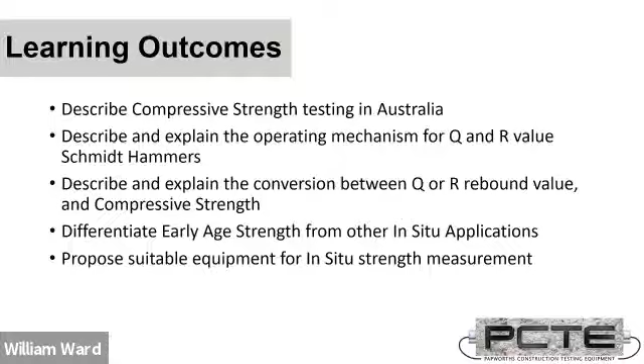I'm also hoping you'll be able to make an intelligent choice of equipment for in situ strength, and know when non-destructive methods are appropriate and when it may be more appropriate to use destructive methods.

Schmidt Hammers themselves are one of the oldest forms of concrete non-destructive testing. Excuse me a second, I'm just going to mute there.

They were invented by Ernst Schmidt in 1950, and have been manufactured by Proceq since then. They're a non-destructive measurement of concrete strength, particularly related to surface hardness, and they're mechanical.

One thing to keep in mind is there's a good case to maintain the calibration and support of your Schmidt Hammers, and also to think about how long they have been in service.

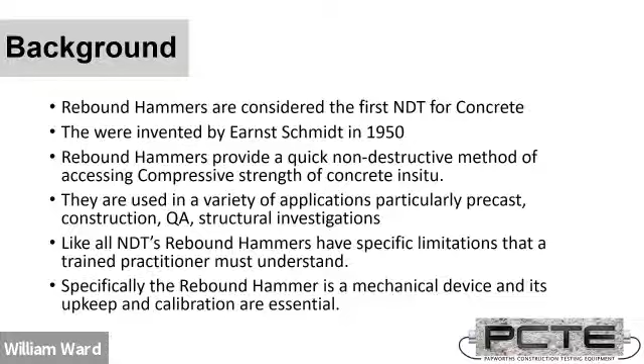As a general guideline for calibration of the different types we supply, the original Schmidt design is typically calibrated once a year or every 1,000 impacts, and the SilverSchmidt design, with its better sealing and slightly different measurement mechanism, is able to be maintained without calibration for 5,000 impacts, or again, we'd like to do that yearly anyway.

So let's just quickly explain what a Schmidt hammer is. It's a rebound hammer, and we correlate a rebound of a standard force on the concrete surface to a converted compressive strength. So a Schmidt hammer is not a small compression testing machine.

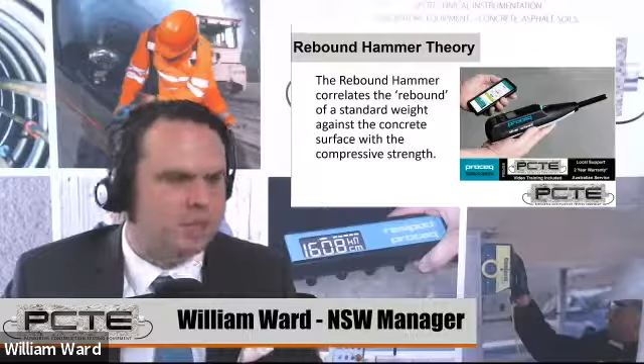It's not taking the same measurement as when we break a cylinder. Instead, we are using information from broken cylinders to create a relationship to Schmidt hammer tests that were conducted on the same cylinders, and that's where the MPa values come from.

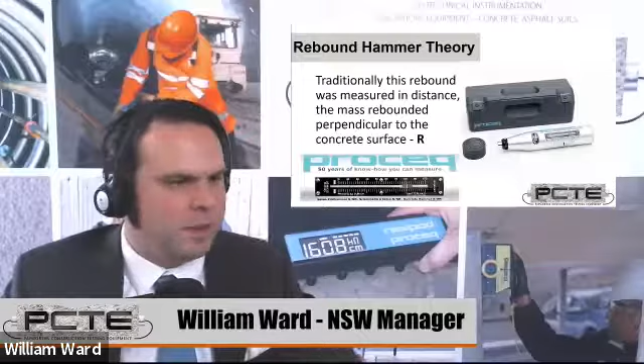The traditional rebound hammer, the original Schmidt, which I've got a picture of here, measures the distance of rebound height. So if you look at the chart, we can see that would be a reading of 82R off that scale, recorded by how far the weight inside the hammer rebounds.

I'll actually show you a quick diagram of the internal workings of these hammers in a second, so you'll be able to see what I mean in more detail. But the original Schmidt's design does use a height of rebound as its measurement.

It's converted to compressive strength using a calibration curve. These are either supplied with the hammer by the manufacturer, so if there's a curve printed on the side of the hammer, or if you're using an internal conversion from units of R or Q, the rebound values, across to compressive strength, you're using a manufacturer curve.

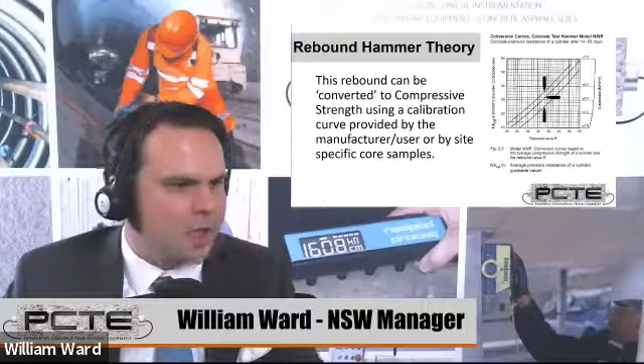Whereas if you've worked with a laboratory to crush samples and build your own relationship, you've made a user or custom curve, and that is the preferred method. It's always best to have curves made for your particular materials, and to understand where the manufacturer's curves come from if you are using them.

Just the first bit of background I want to cover quickly is to go through Australian Standard 1012.8 and 1012.9. Between the two of these, they cover the casting of standard cylinder samples, their curing, their preparation before testing, and the crush testing to break them. That defines what we mean when we say compressive strength of concrete.

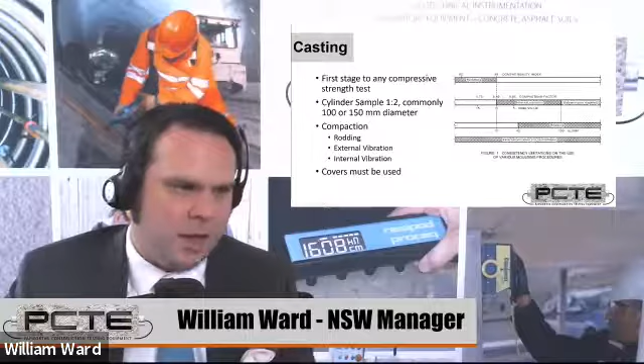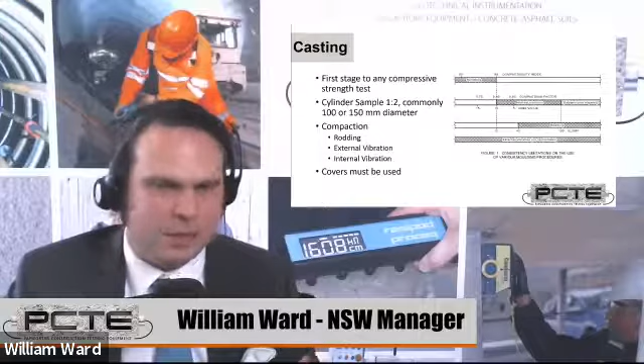The samples are taken from the concrete used on site, or prepared as part of a test batch, and placed into a 2-to-1 cylinder with a cover and appropriately compacted. The standard defines dimensions and compaction procedures to correctly cast that cylinder, cured initially in the mold between 18 and 36 hours, at which point it must be taken out and placed into a standard curing environment, either a water bath or a fog room.

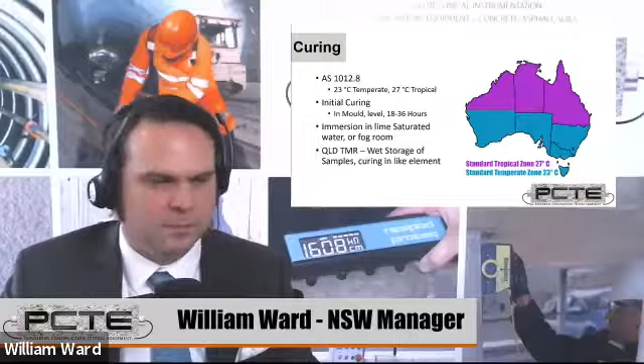There are also sometimes specific requirements beyond the Australian standards depending upon the client you're working with. For example, Queensland Main Roads requires wet storage of samples, curing similar to the element. It's also interesting that we have different standard curing temperatures depending on where we are in Australia. If we're in Queensland, we're in a tropical zone; if we're in New South Wales, we're in a standard zone.

The samples are then inspected. Because one surface in a cylinder mold, which is to be compressed against the platens of the compression machine, is not smooth off the mold, it's either ground plane with a cylinder grinding machine, or has a sulfur cement cap applied, or a rubber cap placed on top to ensure smooth contact, and then it's broken at a rate of 29 MPa per minute.

The standard also defines how that information will be recorded. One important thing is typically these tests are done at 28 days, which means if we want to compare compressive strength values between two different batches, the tests need to be prepared the same way and broken at the same time. That's the whole purpose of having the standards, to ensure that because we're not directly measuring a material property—there's no absolute compressive strength value that concrete inherently has.

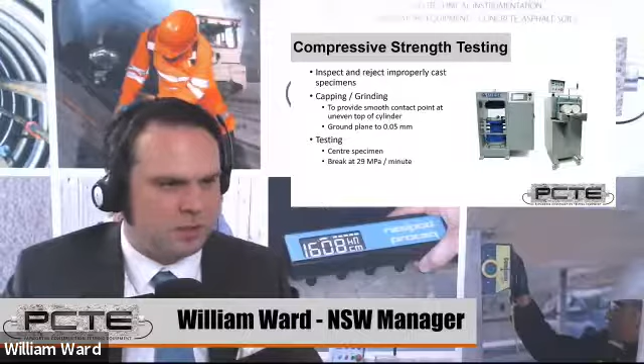It's an agreed upon test method where a certain amount of pressure breaks a sample at a certain time when it's been prepared in a certain way. This is why it's very important, when comparing strength results between two projects, to understand that the tests are done the same way. If you look at overseas research, or in particular things like Schmidt Hammer conversion curves, sometimes those tests are not done the same way overseas. We'll address that a little as we go, but I wanted to talk briefly about how a compressive strength test is conducted.

Moving to the Schmidt Hammer itself, it's at its essence a test of surface strength or hardness, and it's correlated out to strength. The original Schmidt curves will actually have a directionality to them too—vertical or horizontal testing, up or down—and it's establishing what's happening at the surface of that material, so it doesn't take into account the heart of your concrete.

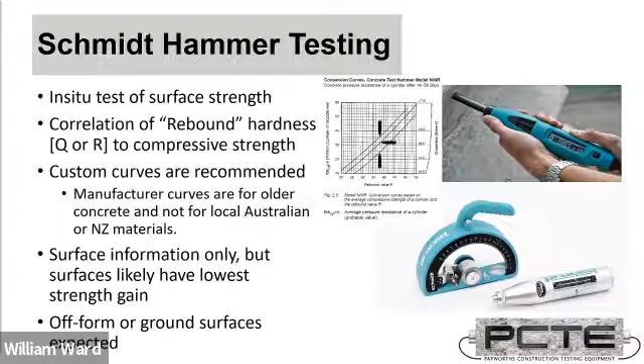This is sometimes not an issue if you're looking to see strength gain—it may be lower on the outside compared to the inside. It is also typically correct to test only on off-form surfaces or surfaces that have been ground back. A work surface at the top of an exposed slab is going to have a different rebound value to the off-form sections of the same material, so that can be a bit of a catch when you're trying to be very precise with Schmidt Hammer measurements.

In standards internationally, and as manufacturers build them, there are two rebound energies used: a type N and a type L. Type N is a stronger impact than type L. Type N is generally used for normal testing, and type L for thin concretes or very weak concretes. Also, an important nuance is that when you go from concrete testing to something like rock testing, it's common to use type L, because the most commonly used standard there, the ASTM standard, actually expects a type L and doesn't mention type N.

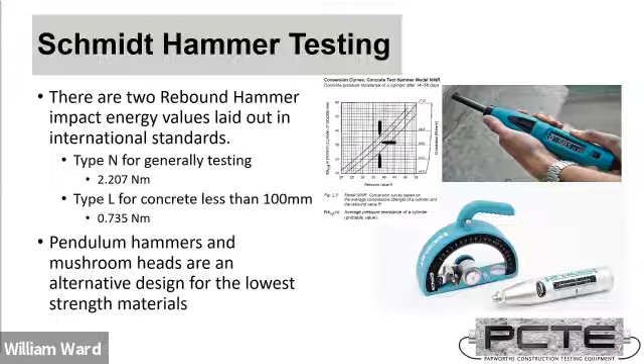So that's something to consider—is there a reason to go with a default impact energy, or do you need a specific one? There are also more specifically designed hammers for very low strength. There's a pendulum hammer, shown on the right, which strikes with a lower impact energy and a broader impact face. Similarly, it's possible to modify a type L Schmidt hammer with what's called a mushroom head, which again has a broader impact face to lower the overall force of that impact. Based upon that, you can determine which particular Schmidt hammer range you'd like to work with.

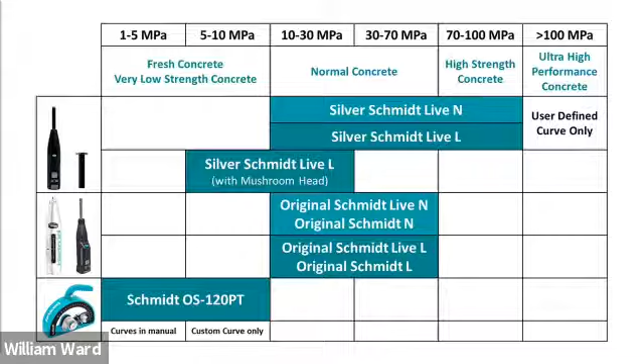Of particular note is that the original Schmidt, in addition to being a little bit more scattered in its results, has a smaller measurement range over which it would typically be used. The SilverSchmidt is larger, and the pendulum hammer, listed here as the OS 120, is most commonly used only for very low strength concrete or initial curing applications.

Let me begin in terms of mechanism. We'll start with the original Schmidt device. The original Schmidt hammer measures rebound height, so we have to apply the type N force. To do that, we have a spring which is tensioned, and a weight. So we know the spring, we know the force. The spring will pull the weight down, which will rebound with a certain amount of force, and that rebound height is recorded.

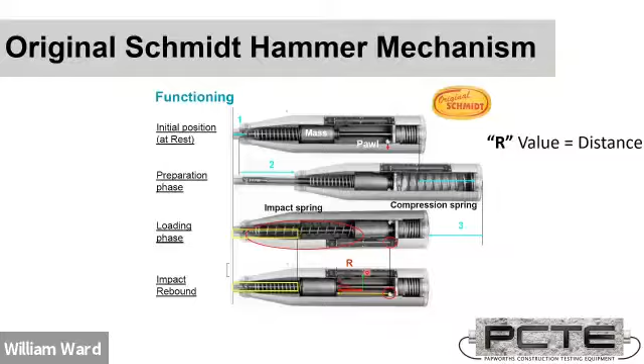So we can see here that we actually measure out the distance that that rebound has occurred, and we're going to convert that.

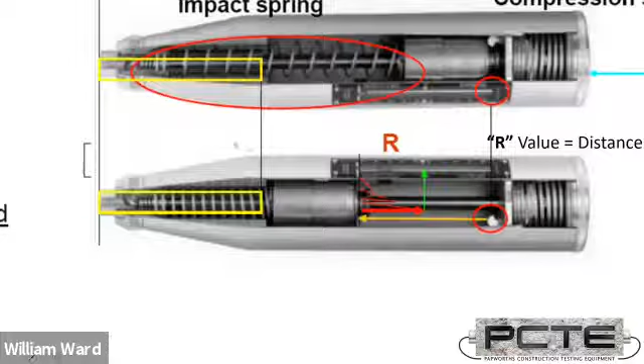And you see then, again, as I showed at the start, we have the height of the cursor. Now we've taken an impact, we've got a value of rebound, but we don't yet have anything that talks about strength. If we want to talk in units of MPa or PSI or some other measurement of pressure, we need a conversion curve. And it's important to understand not only what the conversion curves do, but also how they're created.

You need, if you want to use a curve created using cube samples, to correct back to a cylinder sample curve. If you're using a digital hammer, the original Schmidt Live or the SilverSchmidt Live, you can tell it what your local sample type is and it will correct automatically. But it's very important to be mindful, if you're using a manufacturer curve or a curve from literature, what kind of samples it was created with.

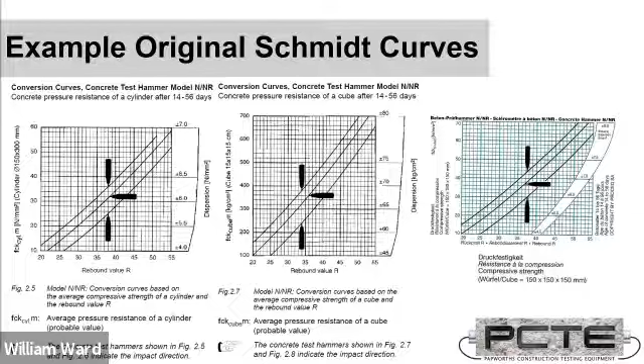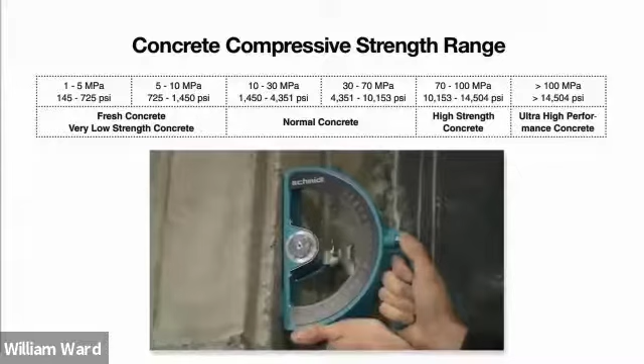So I'll move on to a few more mechanisms now. Let's start by looking at the pendulum hammer mechanism. This is a really clear example of a rebound height measurement. You'll see the pendulum swing and you'll see it rebound to a certain position here, and how that would be read off - so that would be a rebound of 130. And again, this would have a different conversion curve to the SilverSchmidt.

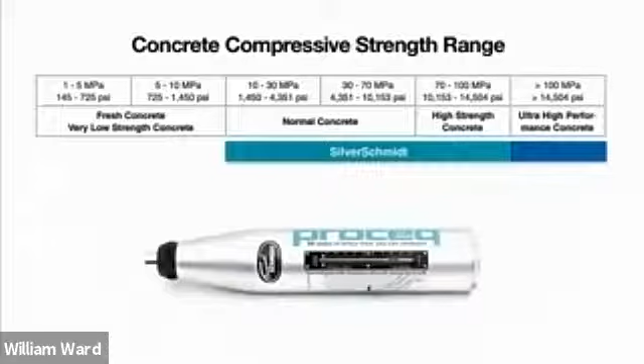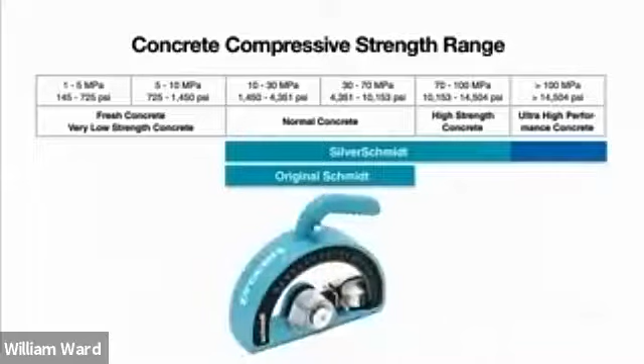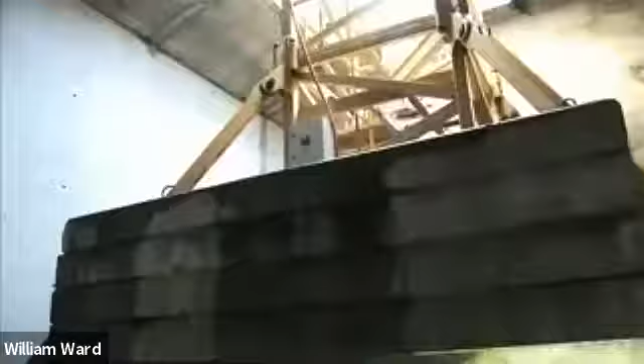Now the SilverSchmidt - this is an optical measurement tool, and we'll see that in a second, but again we're just going through the different mechanisms. The blue SilverSchmidt is a previous model. If you have a SilverSchmidt Live, it is exactly the same internally on the mechanism as a SilverSchmidt PC or ST model - it's been mated with new data logging functionality that now goes to a phone or tablet. I'll show you the data logging when we finish going through our theory this afternoon. But so we'll look at a SilverSchmidt test now. It's used the same way as the original Schmidt.

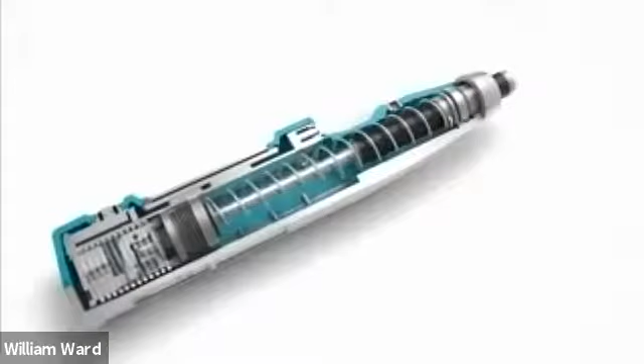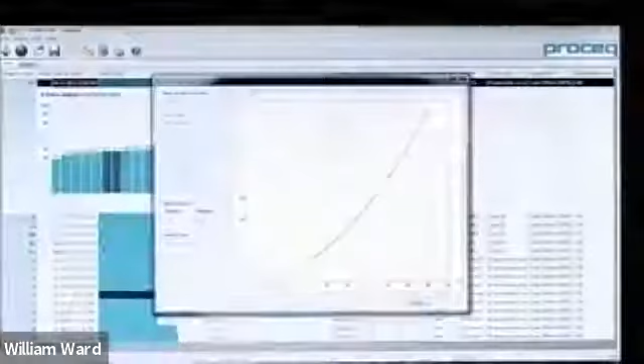So with the SilverSchmidt mechanism, the hammer moves and rebounds off the mass, and we measure the speed of that. To test one area, you take several impacts, usually at least 10, separated by a couple of centimeters. Those are averaged and converted to MPa using a conversion curve. I'll cover how that's done with the SilverSchmidt Live in a moment, but this is the same kind of conversion.

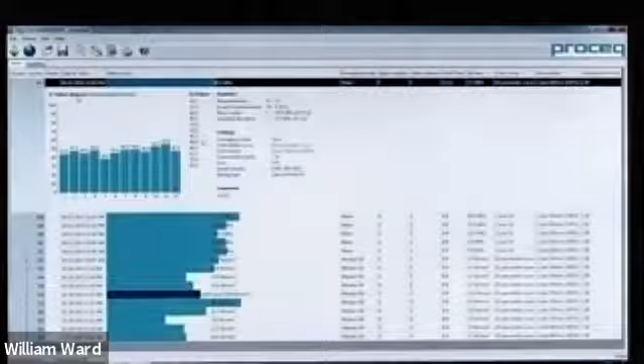So why have we changed from an original Schmidt mechanism to a SilverSchmidt mechanism, from mechanical to optical measurement of rebound force? The difference is primarily one of precision and range. It's not more accurate - a SilverSchmidt test is not necessarily a more accurate measurement of strength, but the results have less scatter to them, and it certainly is more appropriate to use a SilverSchmidt on higher strength materials.

So the first big advantage is the speed measurement, and the hammers themselves remove the influence of gravity. We no longer need to create 3 conversion curves to know if we're facing at an angle, up, down, or sideways. We can test at any angle - gravity is no longer a concern.

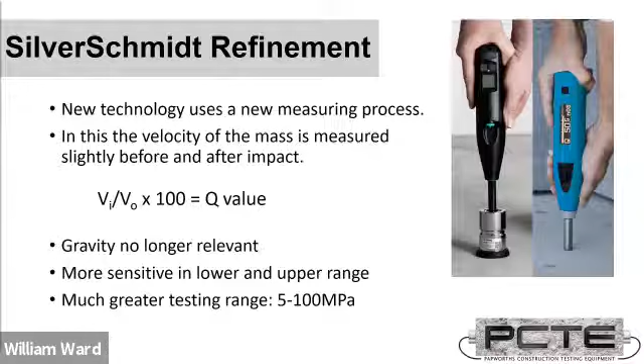It's also got a larger testing range, as we saw in the comparison. The standard curves go up to 70 MPa, and it's possible, where appropriate, to build your custom curves to a higher value than that.

The reason that works is there's 2 effects. One is the curves have a more shallow change between rebound value, so raw units of Q, and strength, so it's a little bit more precise inherently.

The other part is, particularly when you're measuring, is that you're no longer measuring by eye. If you have a rebound hammer, which may be measured to 0.5 of an R value, an original Schmidt measurement, and you try and go from 70 to 75 MPa, your R value may go from 55 to 55.5. That's a very small change, and it's very hard to see on the side scale of the hammer. With a digital measurement, we can pick up that change more precisely, and with the inherent more shallow conversion curve, it's also more appropriate for greater strengths.

So we have a question from Jimmy: does the result get affected by amount of reinforcement, i.e. a heavily reinforced concrete or composite beam? That's a good question, it's a reasonable question. Typically, Schmidt hammer results should not be affected by the steel because it's a surface test. If you had steel with incredibly low cover right under the place of impact, that might have an effect. But because steel should be with 40, 50 mils or more cover, and we're impacting off the surface, that's not going to affect the measurement.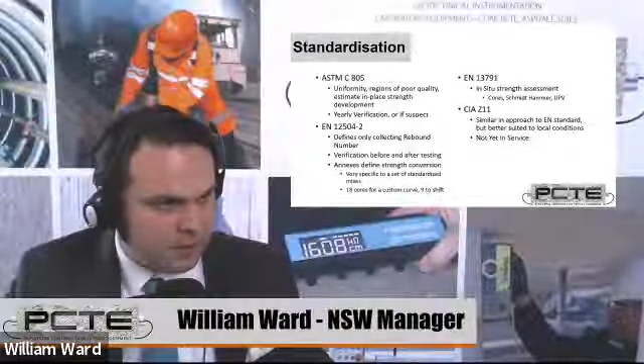The ASTM standard is an American standard. It defines primarily that Schmidt Hammers may be used for uniformity, to find regions of poor quality concrete, and to estimate in-place cured strength. It recommends a yearly verification, similar to our yearly calibration. The American standard is interesting, they're very good at defining what the test is, what the hardware is, and a little about documenting it, but less about how to use and interpret the results.

Now, there's a couple of European standards that do relate: EN 12504-2 and 13791. 12504 defines the collection of the rebound values, the R value or Q value, and it also has a more stringent verification requirement. They want the hammer to be tested versus a reference before and after the test procedure, to ensure it's within calibration before the test occurs and remains in calibration after testing at that site. That would normally be done with a calibration anvil.

There's also a more compact verification anvil available with the original Schmidt Live and SilverSchmidt Live. This is a question that does sometimes come up on the SilverSchmidt Live or original Schmidt Live application, when it mentions verification, that's what they're referring to. Your calibration certificate is more a reference of whether the hammer was supplied reading correctly when supplied and when tested.

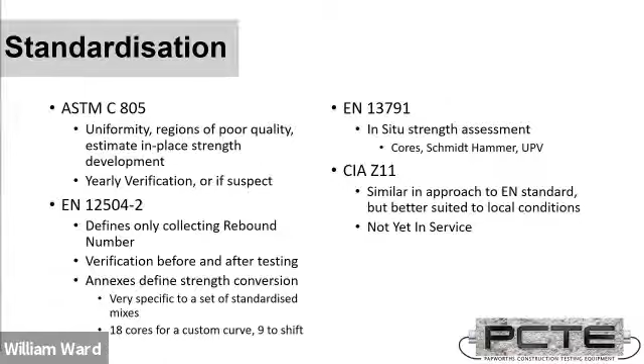Now, as Marek mentioned, carbonation is one other source of interference. Carbonation refers to the effect where carbon dioxide is absorbed into the concrete, forming calcium carbonate and water. This is of concern normally because the carbonic acid that forms is actually a risk of corrosion of the reinforcing steel, as it reduces the pH of the concrete.

But in the particular case of Schmidt hammers, it has an effect where, while the compressive strength, the strength required to break that concrete, does not change, the surface hardness does. Schmidt hammers assess surface hardness, so there will be a higher rebound value where you have carbonated concrete. So older structures, this is of concern, or structures with particular exposure to carbon dioxide, like road tunnels.

If you would like to correct for carbonation, the manufacturer's recommendation is to test the carbonated region, grind back below the depth of carbonation found with phenolphthalein pH indicator, keep it smooth, and then get the conversion ratio between rebound values on carbonated concrete and internal uncarbonated material from the same area.

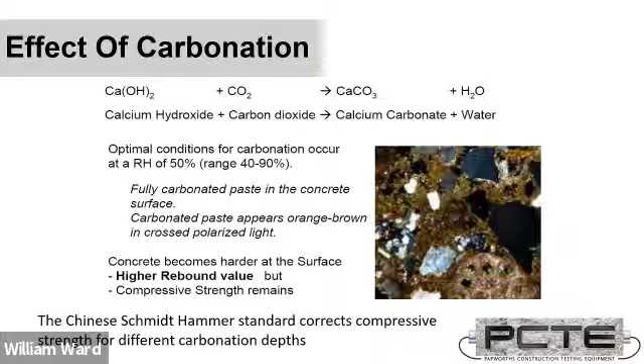Sometimes that won't be good enough, sometimes that uncertainty isn't appropriate, so there are other approaches you can take. You can consider looking at relative strength rather than an actual MPa strength.

Because Schmidt hammers, the conversions are only so good. But one thing a Schmidt hammer is very good at is determining the difference between the same material in different places.

The example I always like to talk about is if you finish one pour with a concrete mix and you've got all your compressive test records and they're correct, and you then have a second pour and for some reason the samples are lost or incorrectly cast, so you don't have compressive strength records for the second pour of the same material, it can be very appropriate to gather raw Q or R values on the known good section and then determine if the second pour, where the results were lost, has similar values, comparing relative strength.

And if there's a difference there, then maybe it needs further assessment. You can also use this where, for example, you are taking some percentage of core samples, collecting and breaking cores in regions where Schmidt hammer tests have been done, and then testing that same mix away from that core area. It extends the validity of those cores, because one of the big issues with a core sample is it's a single point in space. You know that material's right or wrong, but you don't know if an area a meter away is right or wrong. A Schmidt hammer can give you that, and is very good at giving you that.

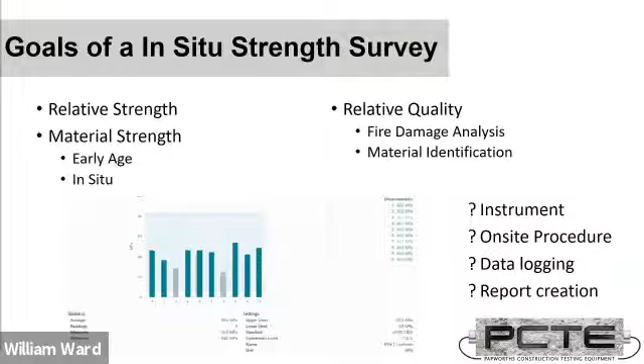So if we are working with the manufacturer's curves only, and it is already a reasonable match to the material on site, your accuracy will still be 20 to 25% uncertainty. We don't know exactly how that matches up, even if it was a reasonable material to use a manufacturer curve for. Manufacturers and standards absolutely encourage users to produce their own curve, as I'm doing today.

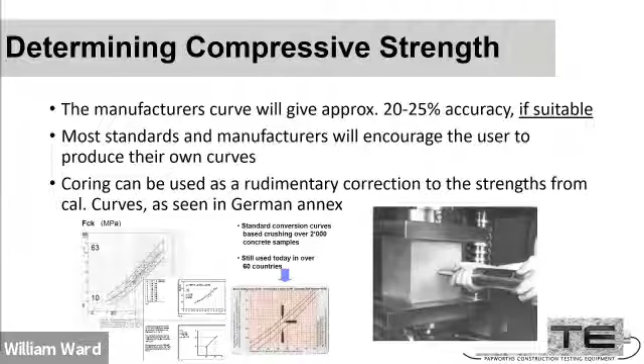You can do rudimentary corrections to strength by shifting existing curves. So if you have a rebound value and a crush sample, you can reduce or raise the entire curve relatively, which is not ideal, but is one way to do a correction.

Now, just to go with manufacturer curves and what the default ones may be, this is for a SilverSchmidt Live in Australia. The key thing is you need to use a 2-to-1 cylinder factor on your scale, because that takes into account that we crush cylinders locally. Units of MPa, that's just appropriate units. It's also entirely appropriate to work without conversion, in raw units of Q value.

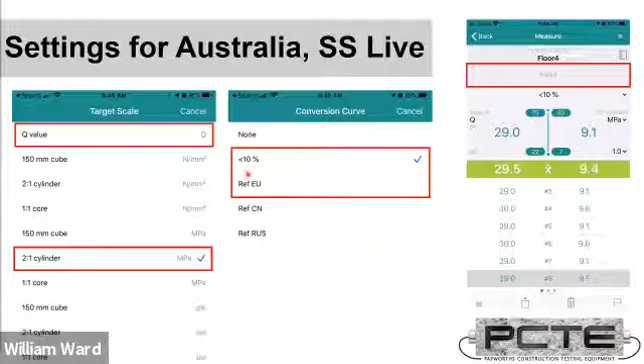Now, the manufacturer supplies us with a number of curves. The two most commonly used are the lowest 10th percentile curve, less than 10% on the chart here, useful for in-place concrete, existing structures where the concrete is cured and has been in use for some time. The European reference curve listed here is reference EU. This used to be called the traditional N curve on the SilverSchmidt PC models, and is more commonly used for freshly cast concrete, so early age strength applications - it can be used as a rough guidance there. Because we're not testing to any international standard, we most often use mean as the setting for standard.

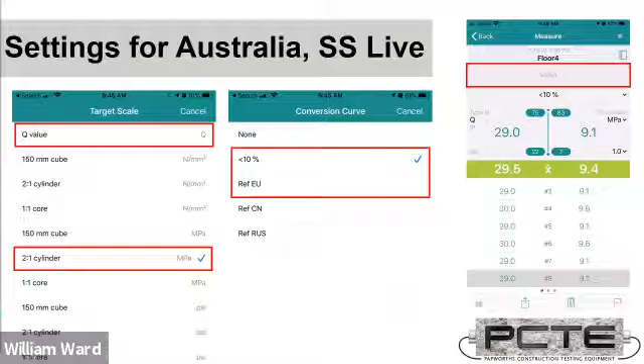Now, the conversion curve and the target scale for the SilverSchmidt Live or the original Schmidt Live are set on the application. I'll show you that when I open the application up shortly. But the standard is physically set on the device, so it's going to be a little bit harder for me to show you that - it's a setting we change on the hammer, it's the standard. The other two are changed on the application and can actually be changed after the test. So if you've put the incorrect values in, you can correct the mistake afterwards because it's non-destructive.

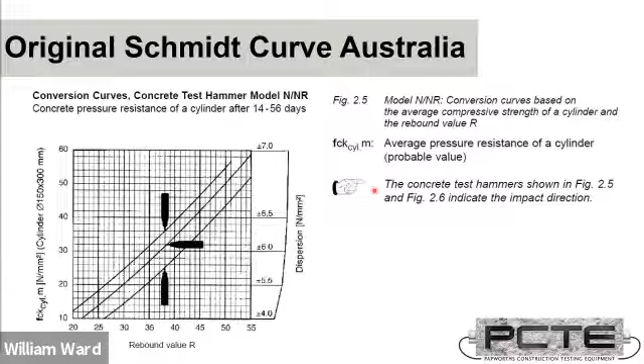Again, most commonly, an original Schmidt curve used in Australia is a cylinder curve, so please be aware of that. And again, you would pick that in the original Schmidt Live application.

So let's just talk quickly about how you make your own conversion curve. You need a series of sample tests before you can build a conversion curve. Typically, if you're taking cores, you would conduct Schmidt Hammer tests in the region of the core, then secure and break the core. If it's cylinder samples, the cylinders need to be properly supported to resist the energy of that Schmidt Hammer - in a cradle of some sort, clamped into a machine, held firmly, so all of the rebound energy is returned by the core. It's not free to move under the impact.

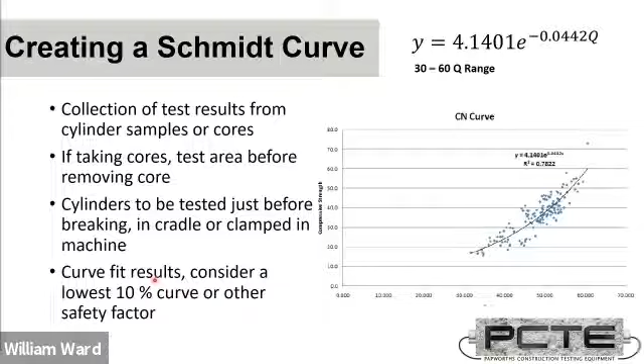And again, once the data is collected, a curve fit is established, and the formula shown here, which matches that relationship, is recorded. This can then be input into the Schmidt Hammer application. In this case, we've put the same information in - it's got a 30 to 60 Q range. So we actually tell the device that we only want the machine to return values of MPa if Q is above 29, below 60. It gives that relationship a value of between 15 MPa to 59 MPa that it can evaluate.

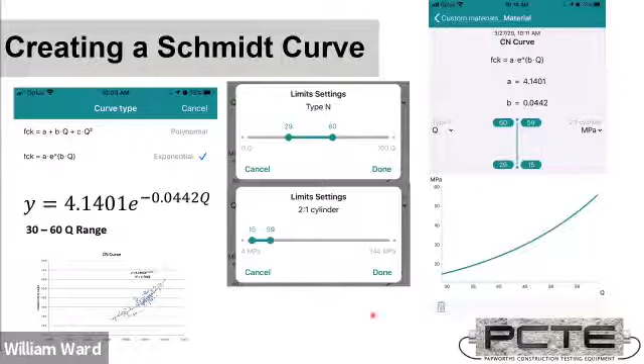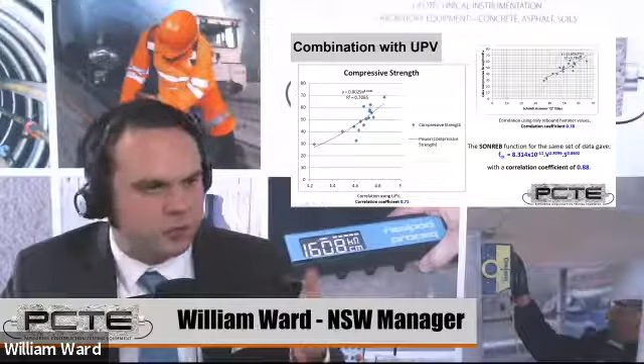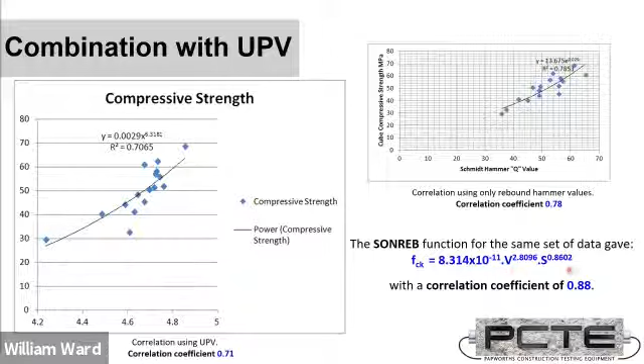So going from there, it is possible to use the same kind of correlation with other non-destructive tests. Quite a common one is to use ultrasonic pulse velocity - that is the transmission time of sound waves through the concrete from one side to the other. We measure from one side to the other, determine the speed of transmission, so that's velocity. In the calculation, we typically measure the distance the sound has to travel and calculate velocity based upon that. Once we've done so, we can also take Schmidt Hammer results and use a correlation curve that, rather than being built with only rebound value or pulse velocity value, is built with both - so it has an input of velocity and rebound.

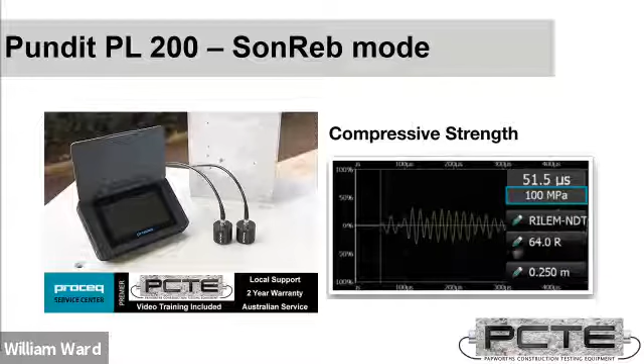If you're using Proceq Pundit PL 200, there's actually the ability to load these curves in, where it will measure - it's a pulse velocity machine - the pulse velocity, and it will also take as an input the rebound value from the Schmidt Hammer.

Finally, before I go into a few demonstrations and show you some of these things in action and answer any questions on the theory, I just want to talk a little bit about early age strength testing. Early age strength testing is a special case because it's about measuring the effect of the hydration. That might commonly be used in precast yards to open molds to lift precast elements out of the molds. This is a very common application for Schmidt Hammers.

It's also used in production sites for schedule and safety. Can we remove the formwork? Can we expose curing concrete to the outside air? Is it safe to allow traffic onto a new pavement? All of this is an early age strength application.

Schmidt Hammers are one of the options we have for assessing early age strength. The big advantage of a Schmidt Hammer test is you can do it again.

One of the most commonly used is an early age cylinder. A cylinder is secured, and it's either cured in laboratory conditions, or it may be cured in the same environment as a precast element, or in some way to catch the real heat of curing, and then it's broken. That's a good relationship to the in situ strength, particularly if the cylinder is tracking at the same temperature as the concrete itself. If it's at lab conditions, it's probably going to come in lower because it'll cure less quickly. But it's a destructive test.

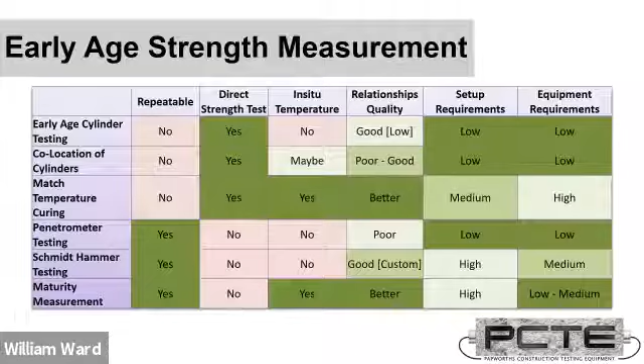So before we continue on to just a few examples of using the hammer, does anyone have any more questions or comments on the theoretical presentation or anything else they'd like to address?

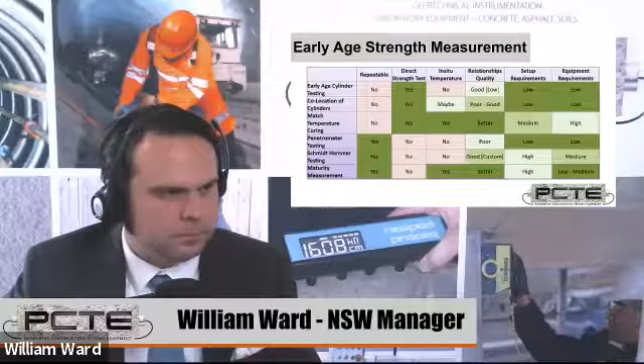Okay, so I'm going to just bring up my phone screen, which should be visible on the screen now. This is Proceq's SilverSchmidt Live, an original Schmidt Live application. I'll be using SilverSchmidt Live as the sample.

Turning that on, I'll describe what I'm doing on the hammer, but you'll be able to see what I'm doing on the application. I'm immediately presented with a screen which says mean, which is the standard currently being used. That could also be an American or European or other international standard. Mean is not a standard, it's just an averaging method.

It means there's no additional verification that we're using the hammer in a certain way—it's simply averaging several impacts. I also have in the bottom left corner 0, which means I am not in the middle of a measurement series, and I'm given the name for the next measurement series.

On my application, if I click into hammer, I can physically connect by Bluetooth to the SilverSchmidt Live, and that indicates that it's connected. If I can even confirm that that's the same one I'm holding here, it'll provide a light to show me that.

Then I have on the top left square, measure has underneath it ongoing with an i. I'm going to go into the ongoing screen, and I'm going to rename my base file name to webinar, because that's what I'm collecting now. So we have this webinar file ready to measure.

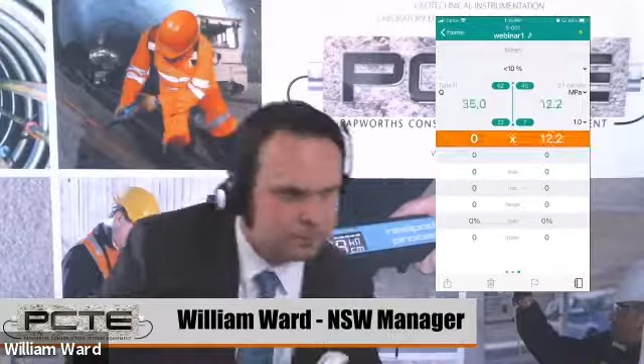Now, the orange color indicates that I don't currently have a large number of measurements. Once I've taken 3 measurements, it's got enough that the average starts to be meaningful. If you had another standard, like European or ASTM standard verification going on, that wouldn't change from orange until it had met the requirements of that standard as well.

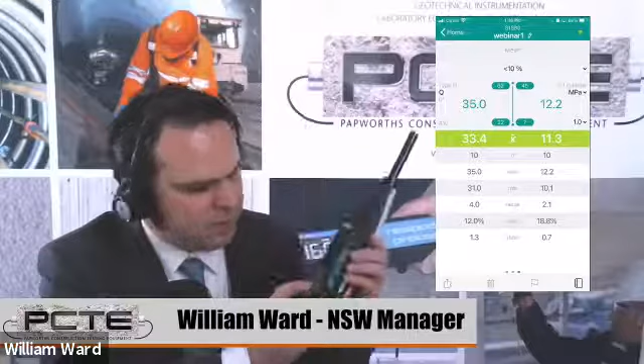So I've completed 10 measurements on my hammer, and I can now, with the buttons, tell it I would like to finish my test. Now my screen goes to indicate webinar 2 at the top rather than webinar 1. That measurement's complete, and I could take another series.

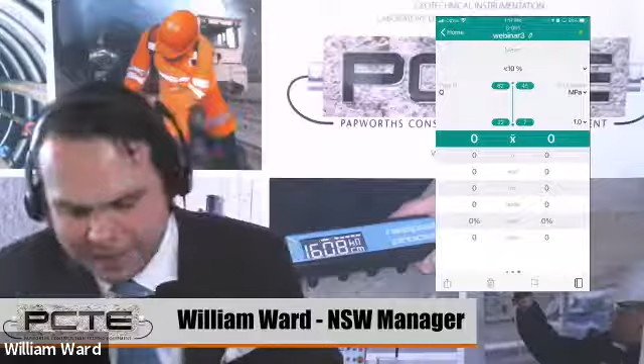So now I've taken 2 measurements under webinar. I can come back out on the phone, and if I go into the measures at the top left box, I can see both of the measurements I've got, and the green cloud means those have been uploaded to a cloud service.

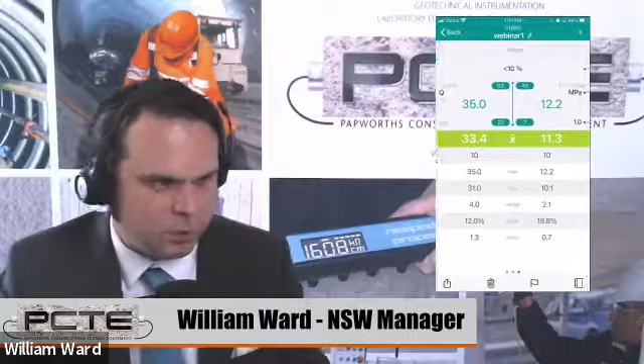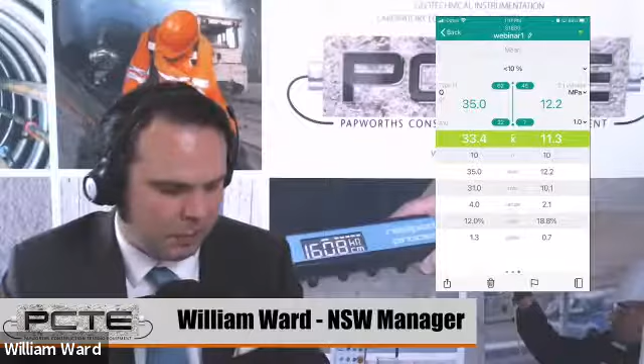Under each measurement, so back to webinar 1, the first 10 impacts I took, we have an average Q value of 33.4 Q, converted to an MPa of 11.3. I was testing over carpet, so I know that's not a real MPa value because I wasn't testing on bare concrete. I also have statistical information, so my minimum and maximum values in Q and MPa, the range between them in Q and MPa, and also the standard deviation between each of those.

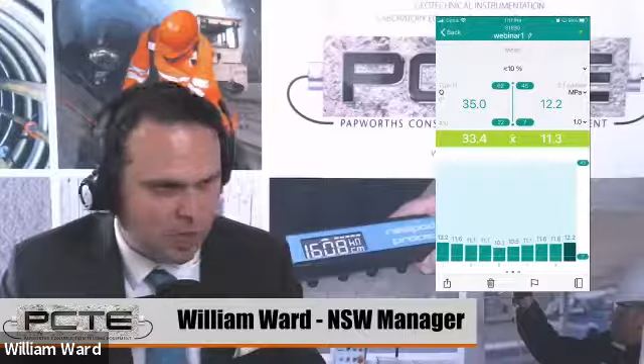If I move my cursor, I can also see a chart of each test and the range of the strength scale, and I can see the results of each measurement.

Because I have this set up on Proceq's cloud service, I can also bring up the same results in Proceq Cloud. So I'm going to change across to a browser window now.

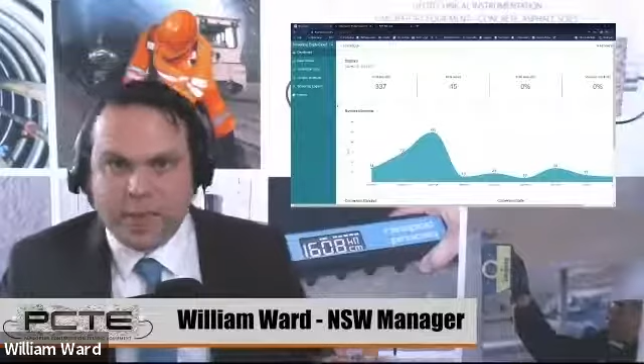So you can see on the browser, I'm connected to my SilverSchmidt Live, and we can see under data review that I have my webinar 1 and 2 measurements here.

So let's go and look at one of those. I have my individual measurements recorded. I also have a logbook, which shows me I took this measurement in the office out at French's Forest here. It shows any changes I've made, what kind of Schmidt hammer I'm operating. So that's all coming together.

I can also, on my phone, actually record where that measurement was taken. So there's the office floor that measurement was recorded on, and that will also now upload to the cloud.

I have a question from Josh. Does the cloud service come with an additional cost or an ongoing subscription? The SilverSchmidt or original Schmidt hammer does not require any additional cost or subscription. The purchase is outright. You receive the cloud service with the hammer at no additional cost or ongoing subscription.

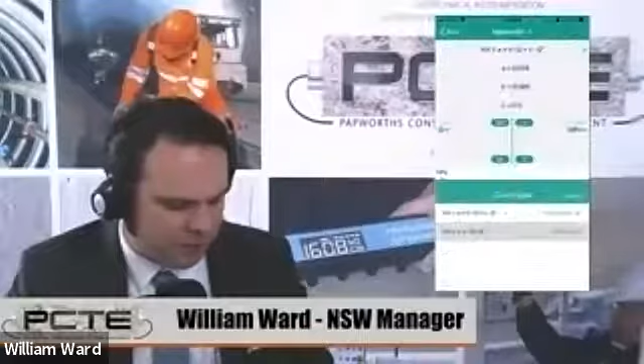A final step is I will just show on the application what the interface for making a custom material looks like. I've got a couple of examples here. They're not real conversion curves, but you see that the operator can choose forms of relationship and put the parameters in.

So you need to do a little bit of work in Excel or with another statistical program to determine the relationship curve and then enter that value. This does mean that once you've got a custom curve built, you'll be able to work with that directly on the hammer. Is there anything anyone else would like to see while I've got the demonstration equipment, or any questions on theory or practice? If there's not, I will finish up the webinar.

Yes, the software, you do have a record of on the software and on the hammer of the number of blows performed. So if we have a look under the application, under the hammer, we can actually see our measurement counter. This hammer has performed 1,892 impacts.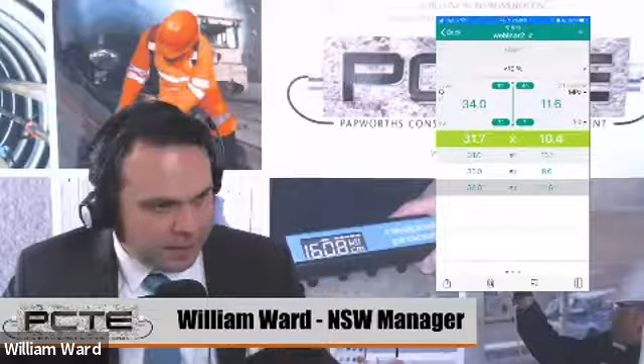Andrew Breckenridge asked, will you be running a similar webinar for, say, the ultrasonic pulse velocity? I'd be very happy to. I actually intend to next present a webinar on cover meters and their use, but we do like to do at least one webinar every year on sonic tests, which would include ultrasonic pulse velocity, ultrasonic pulse echo tools, impact echo tools, several different techniques. The reason I combine sonic testing in presentations is that there's a very good case to combine several sonic tools when assessing structures for voiding, damage, or delamination.

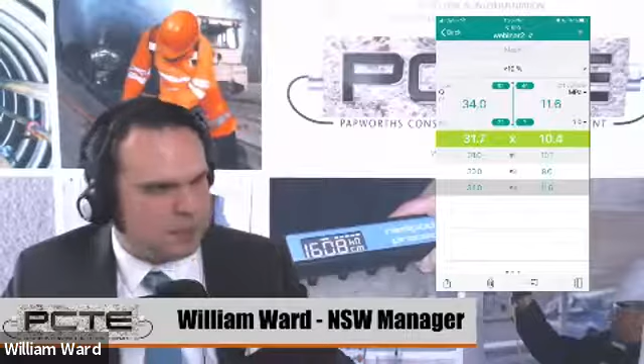It's important to know the broad area of testing a technique covers, rather than using a particular named technique. So Schmidt Hammers are one tool to assess in situ strength, UPV would be another tool to assess in situ strength, and then you have techniques like concrete maturity based upon temperature measurement, which works differently for different purposes. So this has been purely about Schmidt Hammers, but really it has been a discussion of concrete compressive strength and also relative strength measurement using a Schmidt hammer.